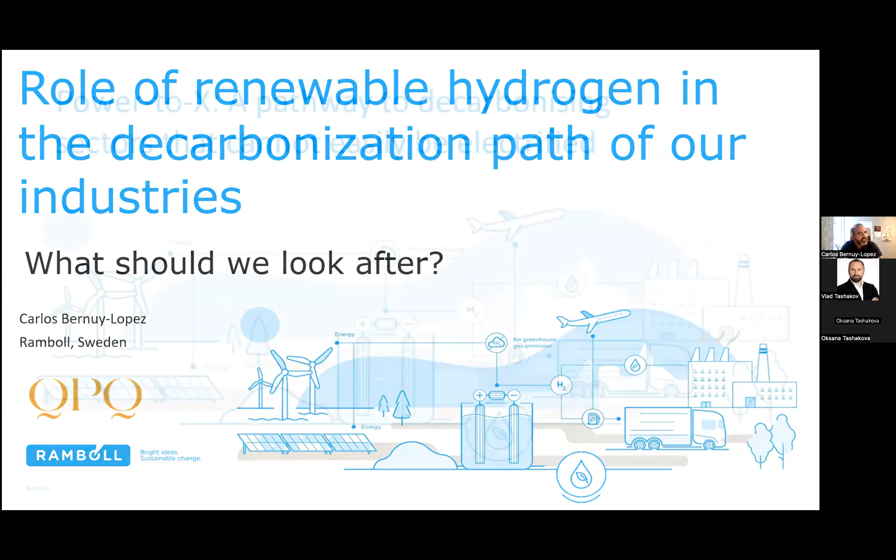Let me start with the concept of Power-to-X. You probably have heard many things about Power-to-X. To put it simply, Power-to-X is a tool that will allow us to bring renewables to places where it would be very difficult to get them—very difficult places to electrify directly. We can see in the picture the trucking industry, planes, and we should also add the maritime industry as our main focus to work with.

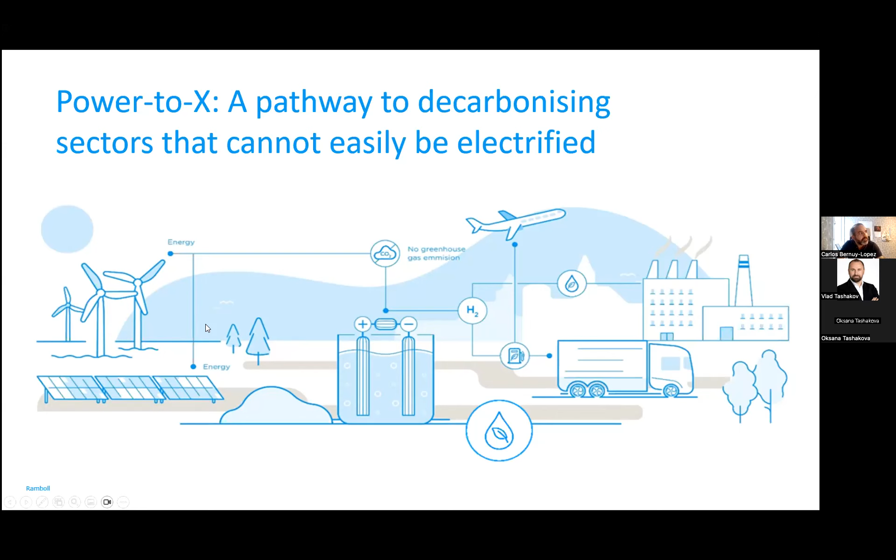So when you hear about Power-to-X—and sometimes it's a bit of a strange concept—think that hydrogen is at the center of it. But it's not only about hydrogen. It's about much more, because it could be about producing e-fuels, or about utilizing CO2, capturing the CO2. So it's a quite complex terminology that helps us bring renewables to those applications that are very difficult to electrify.

So let me explain a little bit what will be the role of green hydrogen, by telling you about our current use of fossil hydrogen, and I'd also like to refer a little bit to the current use of steel to motivate the use of this molecule.

You'll see that it is not new—we are already using quite an important amount of hydrogen. You could see 90 million tons, 100 million tons, depending on the source; you could even have less, but it's around that figure. It's responsible for an important amount of emissions, 7% of the total emissions in the world.

I'd also like to refer to the quantity of jobs associated with this industry, something quite relevant when we think about the economy. So over 3 million jobs are directly linked to the fossil hydrogen industry.

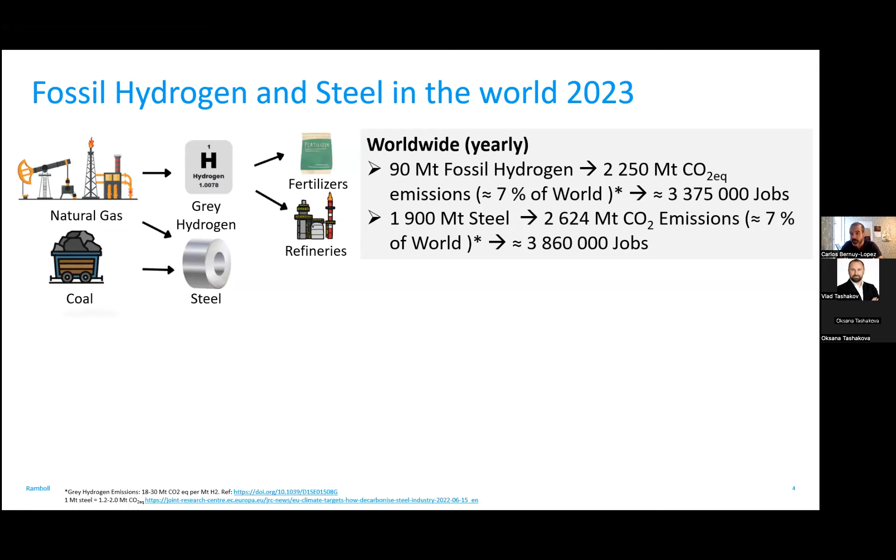I also put steel here as motivation. We all know steel is a very difficult industry to decarbonize. We don't have to emphasize the importance it has in terms of emissions, but also realize how important it is in terms of jobs and how many industries depend on it.

As you know, I come from Spain, I live in Sweden, and I work for a Danish company, so we are in a very EU context. I often refer to EU numbers to understand how big these things are.

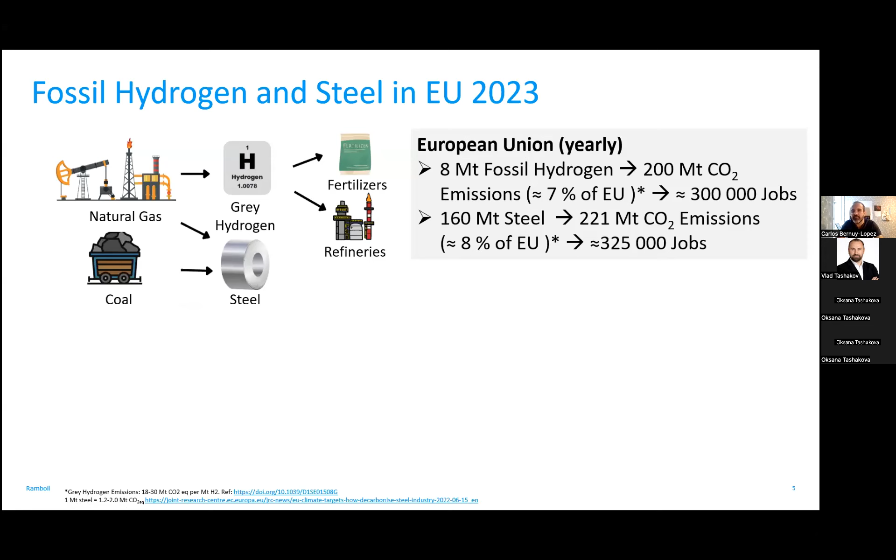So for us here in the EU, the use of fossil hydrogen is also quite important—it's not used far away. We also use a lot of fossil hydrogen and lots of steel. So there are lots of emissions that need to be tackled, and this is the motivation that brought the EU to these quite ambitious plans.

Producing around 20 million tons of renewable hydrogen, because it's not only about green hydrogen.

I will come back to that a little bit later, but it is quite a substantial task just to produce 10 million tons, which is the target the EU has set to produce internally. We would need around 100 gigawatts of electrolyzers that need up to 200 gigawatts of new renewable energy generation. So we are talking about a lot of electrolyzers to be built and a lot of renewable energy generation to be installed in order to decarbonize just these two sectors, which are not the only ones that we could decarbonize with hydrogen, as I was telling you at the beginning.

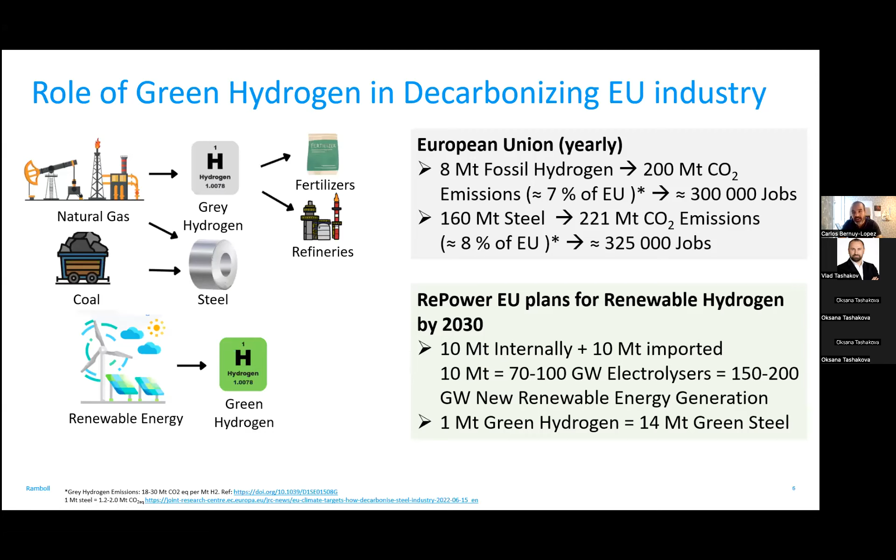But coming to this, I think it is a nice reflection and a nice discussion to think how much hydrogen will be needed in our decarbonized world. So first of all, I think it is important that we acknowledge where the hydrogen needs to be used. And as I was telling you in the first slides, hydrogen needs to be used for everything that is very difficult to electrify. You probably all know the famous hydrogen ladder from Michael Liebreich, which tells us the uses where it is much more favorable to use hydrogen, and other ones where we should electrify directly, because it's going to be much easier and much more economically advantageous to do it.

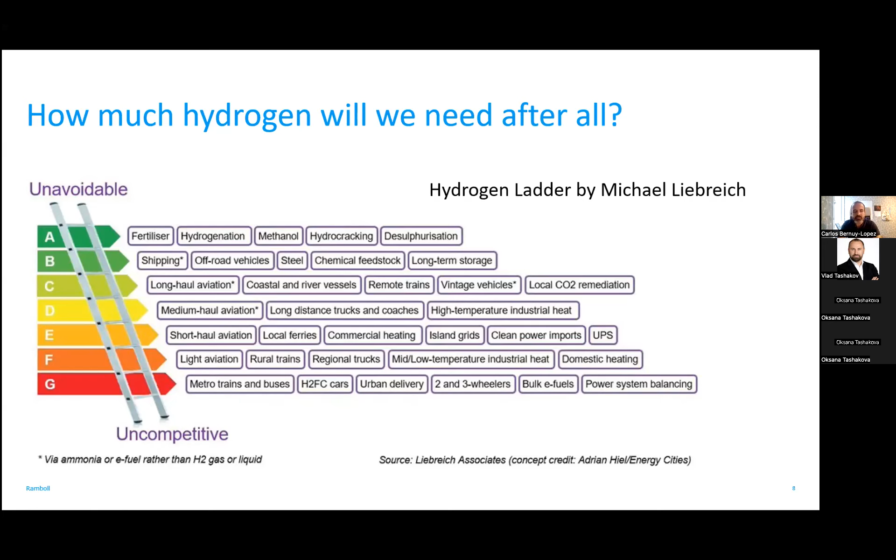However, there are debates and disputes about how much hydrogen is going to be needed. There are two main currents of opinion, but even the ones that are much more pessimistic, or let's say the ones saying that we will not need so much hydrogen, for example the Hydrogen Science Coalition, with Michael Barnard, whose posts you can probably read quite often on LinkedIn and social media, are anticipating that we will need lots of hydrogen, so more than 100 million tons. Some people are defending that we will need 300, maybe 400, 500.

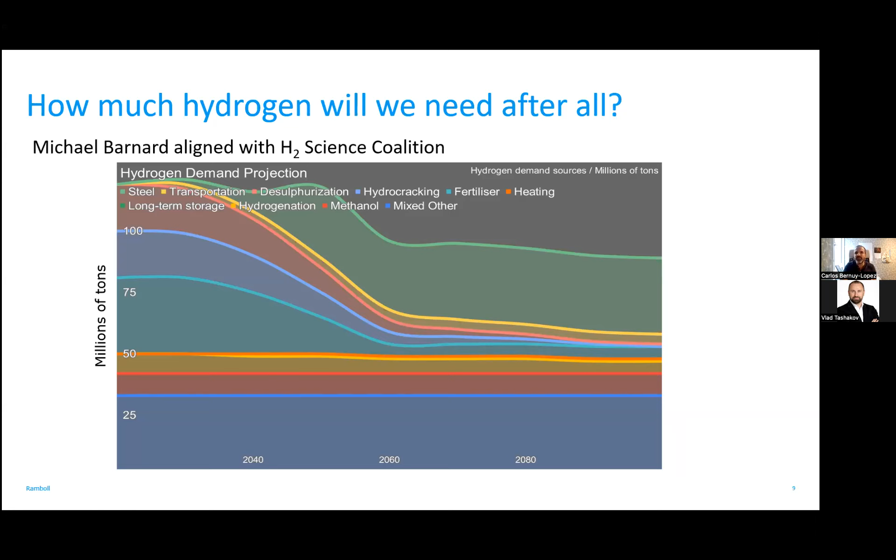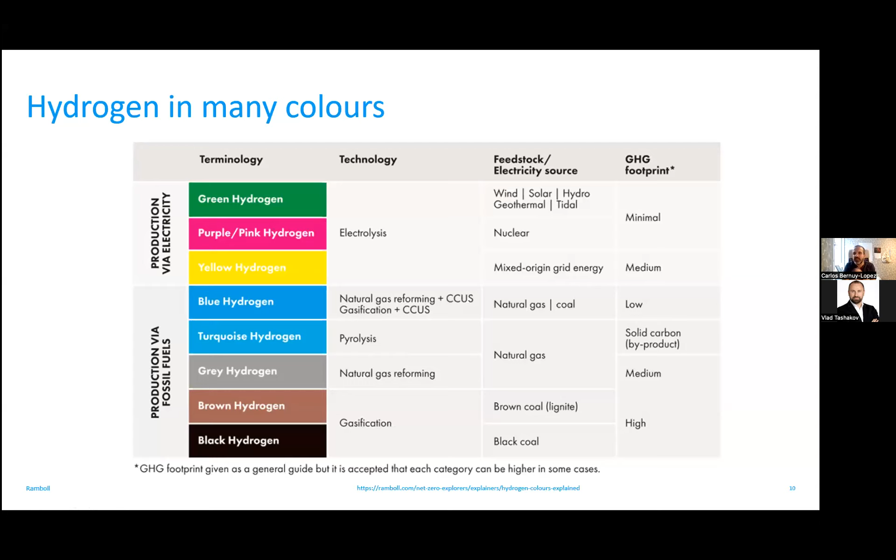So in this sense, I think it is also important to come to the types of hydrogen, right? We know that there are plenty. Sometimes it's getting a bit confusing. Right now we are mainly having fossil hydrogen, the ones here in the bottom part of the slide. Okay, which types of hydrogen will we have in the future? Well, in my opinion, and that of many of the people with me, the main types of hydrogen that we will be having in the future are these three, most likely with a large percentage of green hydrogen. Not little regarding blue, and probably not zero regarding gray hydrogen, because I guess we will continue using some fossil fuels, and in some cases gray hydrogen will still be produced.

Also, I think it is important to mention here what we call pink hydrogen. That's the one that is made with water electrolysis plus nuclear energy. So instead of getting the electricity from renewables, it's getting the electricity from nuclear power. As you can imagine, in the countries where this energy is predominant, the logical thing to think is that pink hydrogen would be the dominant type of hydrogen.

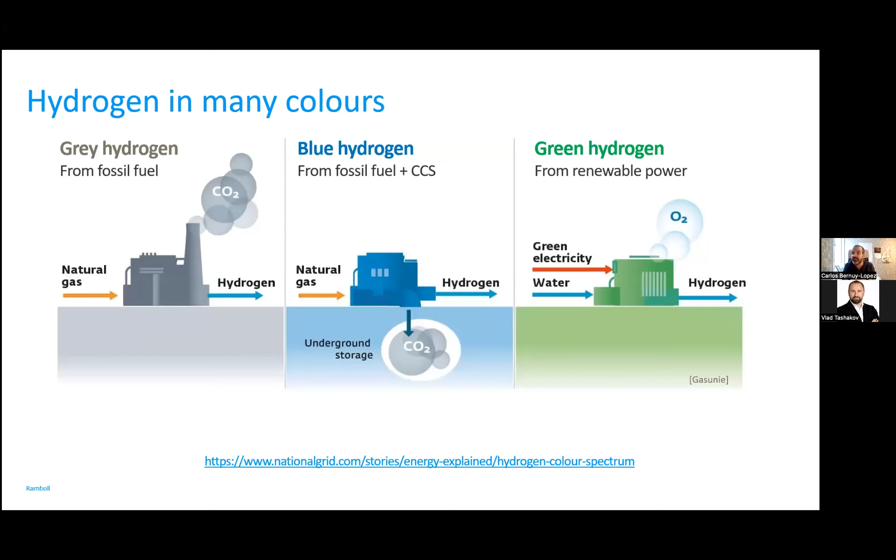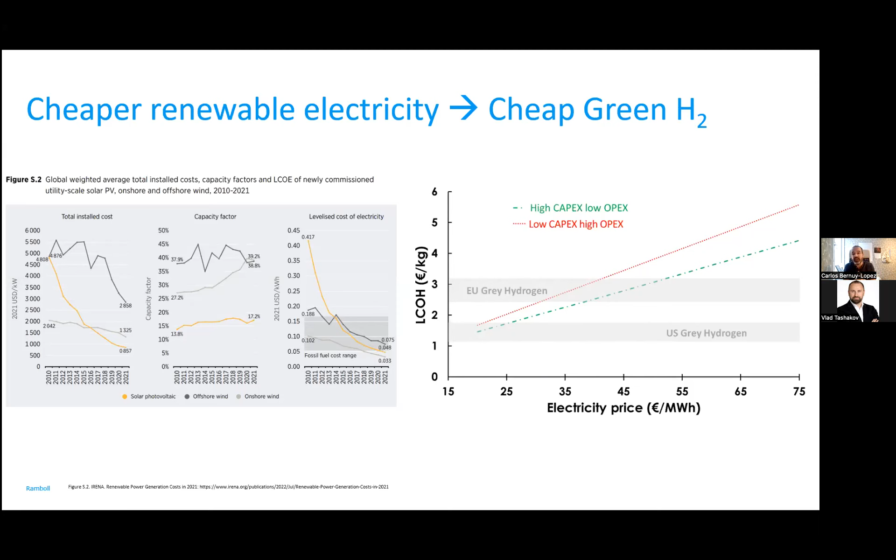So, saying all this, and as a bit of recap, taking into account what the hydrogen needs to be used for, the different tensions asking for too little hydrogen or too much hydrogen, and the types of hydrogen that we can have, some of them renewable, some of them less renewable, I think it is quite reasonable to think that around 200 million tons of hydrogen, of the molecule itself, will be needed in the future.

Myself, I always said all right, let's consider that at least half of that quantity will be green hydrogen. So that's a little bit why I'm promoting this number: hey guys, let's try to produce 100 million tons of green hydrogen as soon as possible. It is something that is not going to happen overnight, because right now we are producing nearly nothing.

So we need to come from 0 to 100 as fast as we can. And we are not talking about the 500 or 600 million tons that other people are claiming or other studies are defending. So myself, trying to be on the pragmatic side of the story, I say, okay, let's do this first and see where we get when we get there.

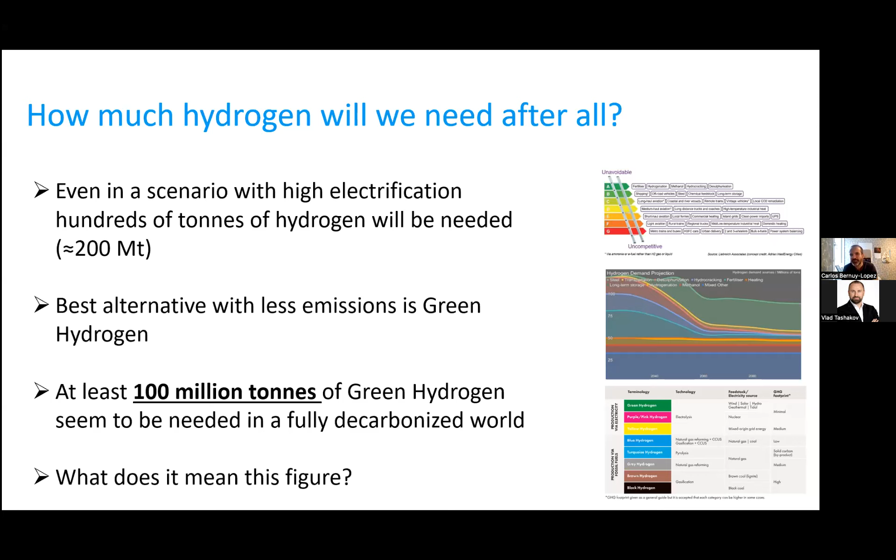But 100 million tons is a number and unit that probably for many of you doesn't say much. So let's try to bring this figure down to reality. First of all, 100 million tons of green hydrogen represents quite a large market size, as you could see. Just taking a value of 1.5 euros per kilo, you see that this is a more than interesting market to pay attention to, and that's the reason we see so much attention and so much traction in the last years.

When it comes to the electrolyzers, one can do simple math. Allow me a little bit. Maybe it's a bit too simple because it takes into account maybe too little a capacity factor and too little efficiency. But to give you a good number that won't be far from reality: in order to produce 100 million tons of green hydrogen, we need to have 1 terawatt of electrolyzers. And 1 terawatt is 1,000 gigawatts of installed capacity of electrolyzers.

This by itself is also another very interesting market sector. And one can measure with simple math, which can vary depending on which electrolyzer price you take, that this market sector is a very interesting one among all the renewable technologies that we have. And for you to realize the task that we have ahead, you need to know that last year we installed about 5 gigawatts. So we need to go from 5 to 1,000, in my opinion as soon as possible, because this will contribute to fighting climate change, which is what we are all here fighting for.

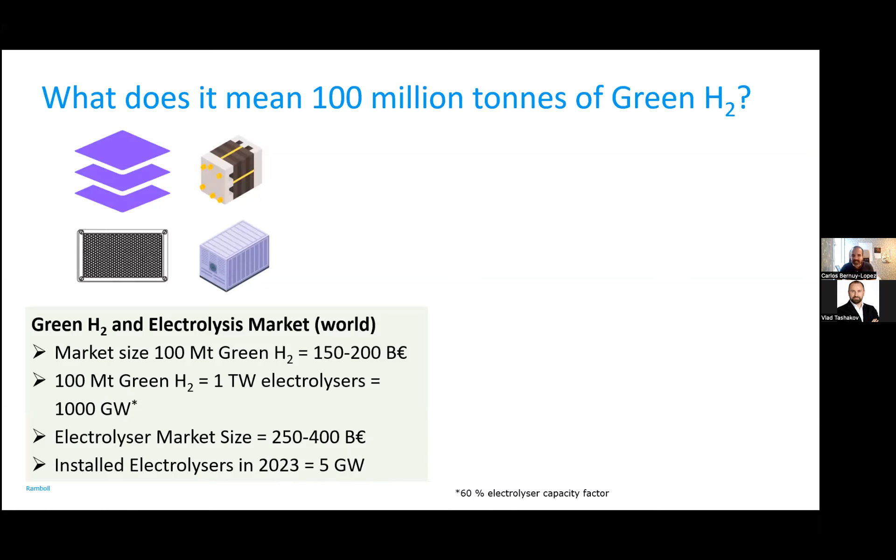But at the same time, this needs to be correlated with the renewable energy needed, right? We all know that to produce green hydrogen, we need renewable electricity. One may think that 1,000 gigawatts of electrolyzers is a lot of renewables that we will have great difficulty getting. Well, a simple math again is to just multiply this number by 2 or 3 to get the surplus renewable energy that will be needed to produce this hydrogen. And if we consider that this is electricity coming from solar energy, one can calculate how extensive 3 terawatts of solar panels is. That exercise is a bit silly, but it gives us a conception of what 3 terawatts of renewable energy means.

So if we fill a country like Croatia with solar panels, we will be able to get the energy. Just have a look at the world map, zoom out to see how big Croatia is with respect to many places in the world where we have available land to get renewable electricity, and we could all agree that this is not a matter of not having enough renewable electricity. It's a matter of getting it done.

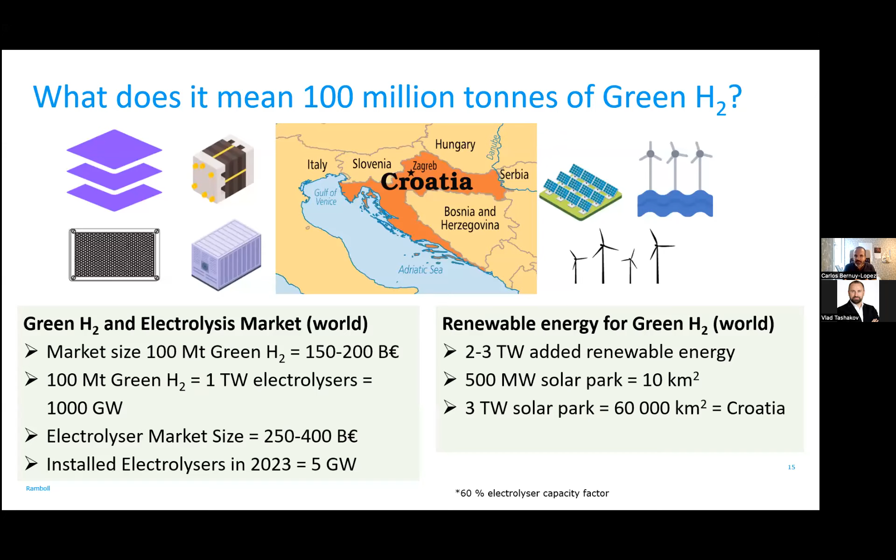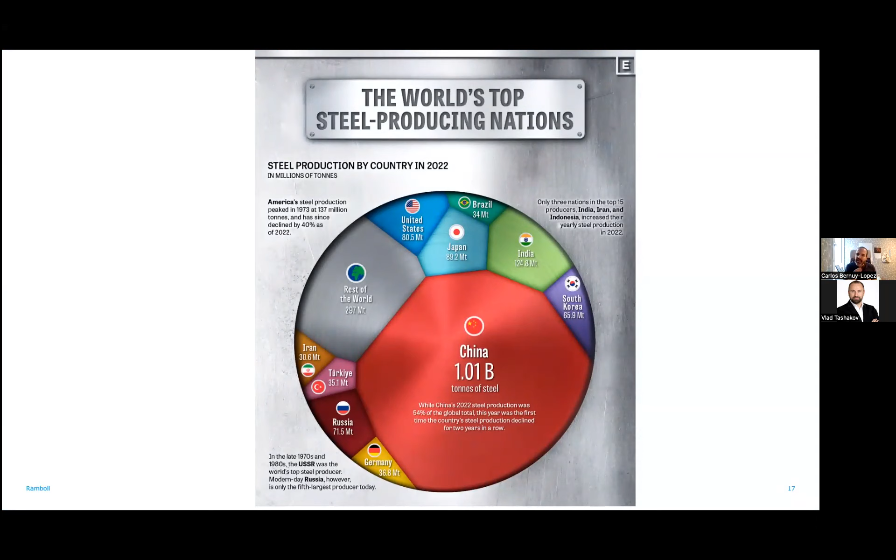So after this, I'd like to come to the second part of my presentation, which is telling you a little bit about the concrete case of steel. Steel is one of the more difficult sectors to electrify, and therefore it is where we are putting our hopes for hydrogen to contribute to decarbonizing this sector. You probably all know that steel is produced unevenly by different countries, and I put this picture to make you aware of how steel could have different importance for different countries.

So that kind of also, can you think of how China will look at this, most likely sooner than later, in my opinion? Or other countries, maybe I put my home country, Spain, may put other things first, or maybe give it less importance, because it is not such a big contribution for their economy. So it is a little bit to realize the unevenness of things, right?

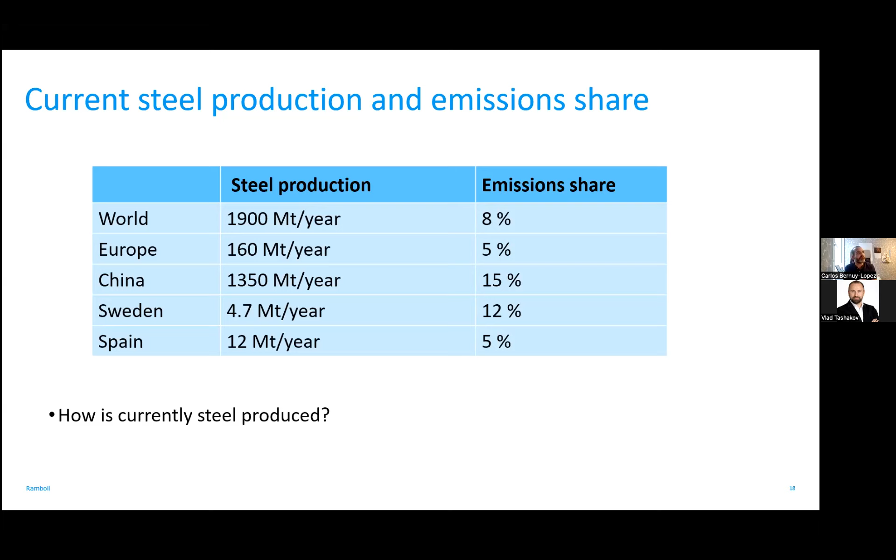It won't be all happening at the same time, because not everyone has the same interest for their own local industries. It doesn't mean that we don't have to address them, but I think it is also quite nice to realize about the different tensions in the world to overcome them as best as we can.

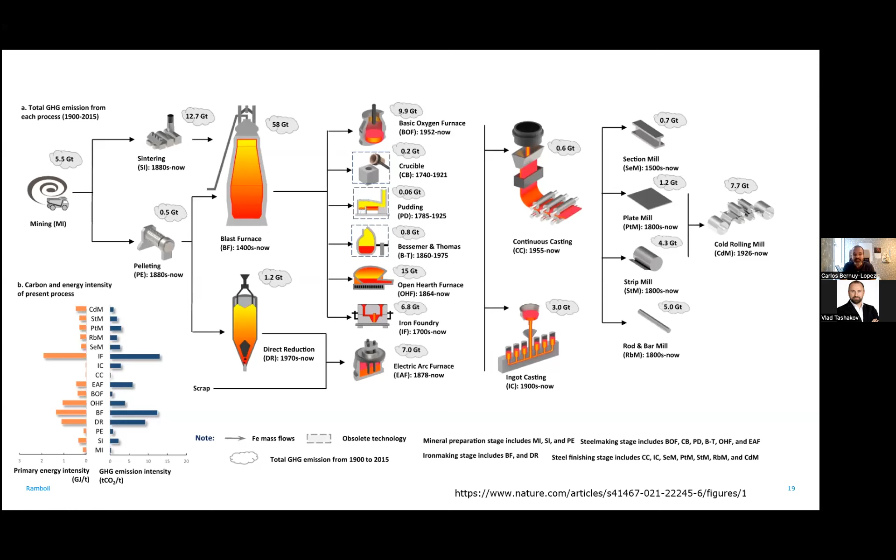And you see how the blast furnace is one of the biggest contributions. And it is there where we are willing to get our hydrogen to work. And this brings me a little bit to also explain to you how we produce green steel. Green steel is produced with the use of green hydrogen. So remember that in order to have green hydrogen, we need renewable electricity, and we use that green hydrogen as a reducing agent for our iron ore that we are going to put in a reactor that we call a direct reduction unit.

And from there, we will obtain what we call a decarbonized product, and that is the one that we will use in some more traditional, well, not so traditional, because they are electric arc furnaces, and they are ones that have been rather modern. You know that steel has been produced for more than a century, even nearly two centuries. So the electric furnaces for the steel guys, it's quite new.

So the combination of these three things, the production of green hydrogen, the use of a DRI tower, the direct reduction of iron, DRI, and the utilization of electric furnaces, of course fed with renewable electricity, will lead us to green steel. So this is why we are focusing so much on hydrogen, and why we are now saying that we need to push green hydrogen to be developed for steel to be decarbonized.

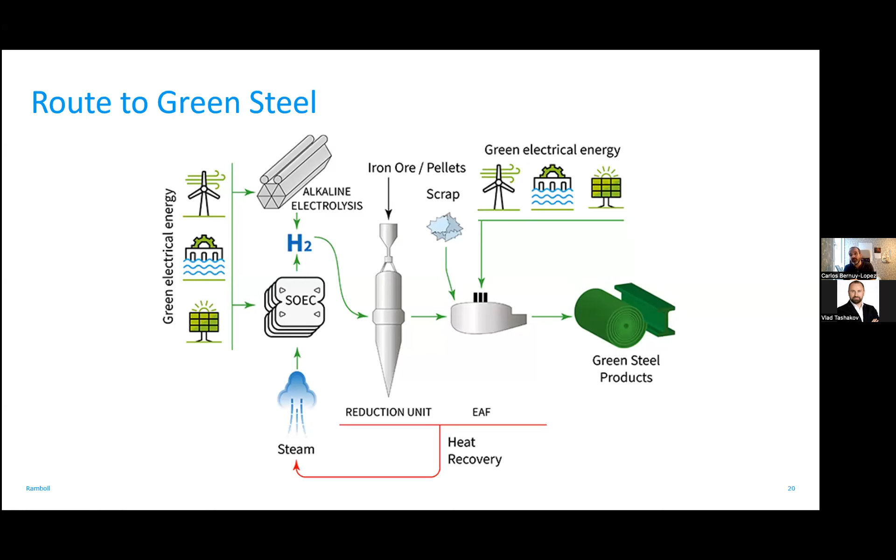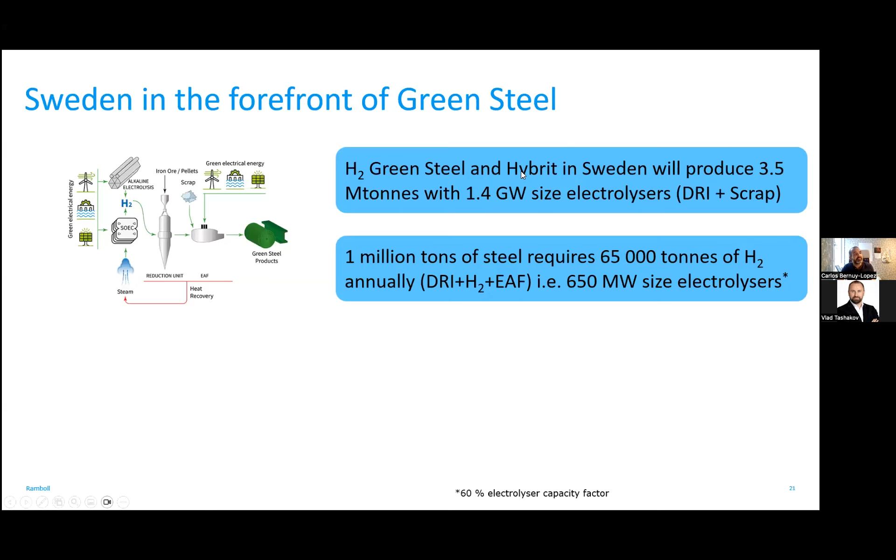And just to give you a bit of numbers of Sweden and their activities to realize how this is happening for Sweden. So there are these two main initiatives in the very north of Sweden, where they will produce 3.5 million tons with the utilization of 1.4 gigawatt electrolyzers. So this is a considerable amount of the current steel production of the country. As you see, right now, Sweden produces around 5 million tons. So it means that we will decarbonize more than 50% of the current production in a few years, because these two projects would like to be online in the late 20s or early 30s at the latest.

All right. So coming to this point, I would like to also make you reflect about how to make this happen. So how do we produce green hydrogen? Well, first of all, I think it is important to realize what we have in a hydrogen plant, because we've been putting a lot of focus on electrolyzers, but the hydrogen plant is much more than electrolyzers.

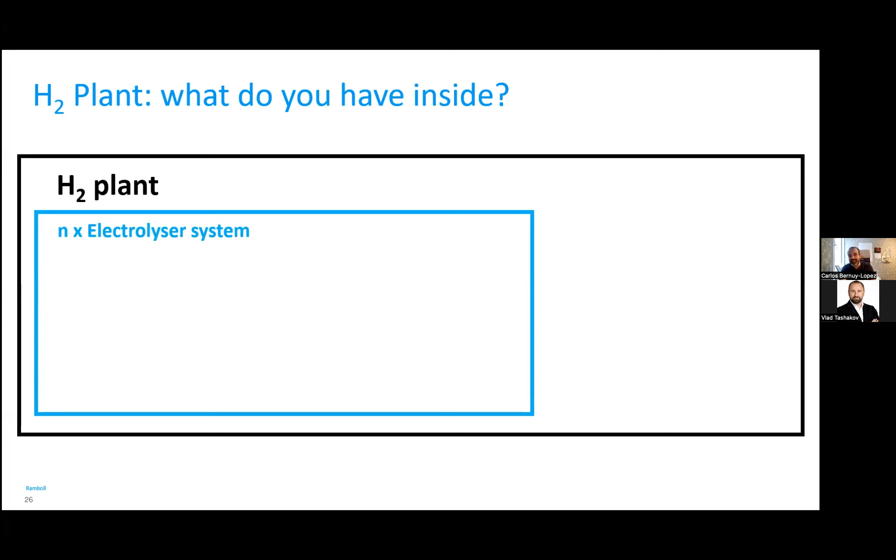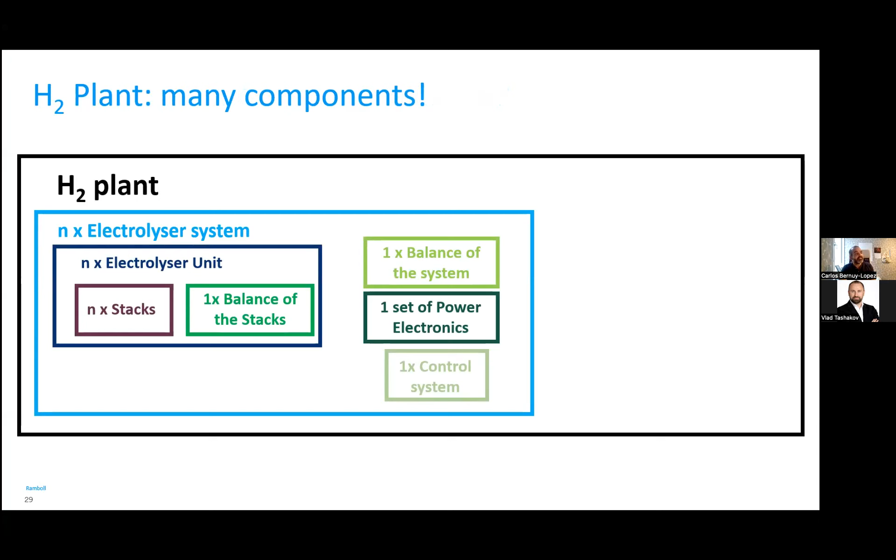It is true that electrolyzer systems are rather complex pieces of equipment. They are made of different parts, such as the stacks, the electronics, the balance of the stacks, the balance of the units, in order to have the gas purified and separated, and so on and so forth. But many times you would need to either have a few electrolyzers together, or to end your hydrogen plant with extra equipment, equipment related to what we call the balance of plant. So compressors, nitrogen supplier, air supplier, hydrogen storage, very dependent on your specific project.

So many times you will realize when you are doing this sort of project that you cannot only rely on the electrolysis and the electrolyzer manufacturer. You need to have a very good picture of what is happening and what we need in order to have the hydrogen that your offtake will demand. Sometimes you will need hydrogen at high pressure, or you will need hydrogen at normal pressure, and compressors won't be needed.

And depending on this final need, you could use it also to produce ammonia. We could use it also to produce sustainable fuels. It's going to have different requirements. That's where the balance of plant comes into place. It's probably too little to realize the dimension of this, but these are things that you need to take into account. I also put other boxes that need to be thought about.

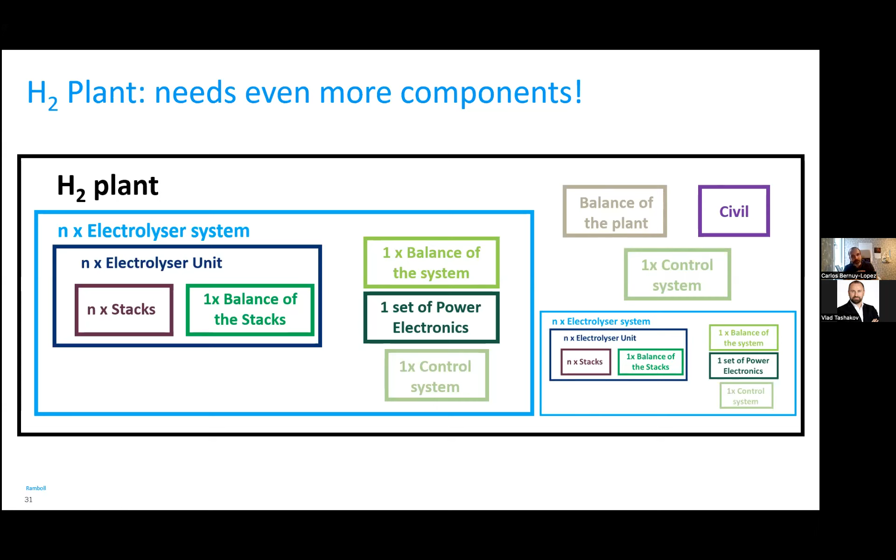And maybe here we can also realize, because you can always have your electrolysis unit or your electrolyzer unit at the center of the hydrogen plant, but you need to make sure that you have the right water; we need high quality water to do the electrolysis. So you need a water treatment plant. You need to have cooling for your equipment. You have a lot of equipment, you need to make sure that you have that. You need to take care of your power connection. You have a lot of power to handle, and that is something that you need to take care of.

Something that sometimes is disregarded is all the civil work that needs to be taken care of for hydrogen plants: buildings, infrastructure, access roads, all these things that need to be put together in order to have a working hydrogen plant for the desired power-to-X project that you would like to develop.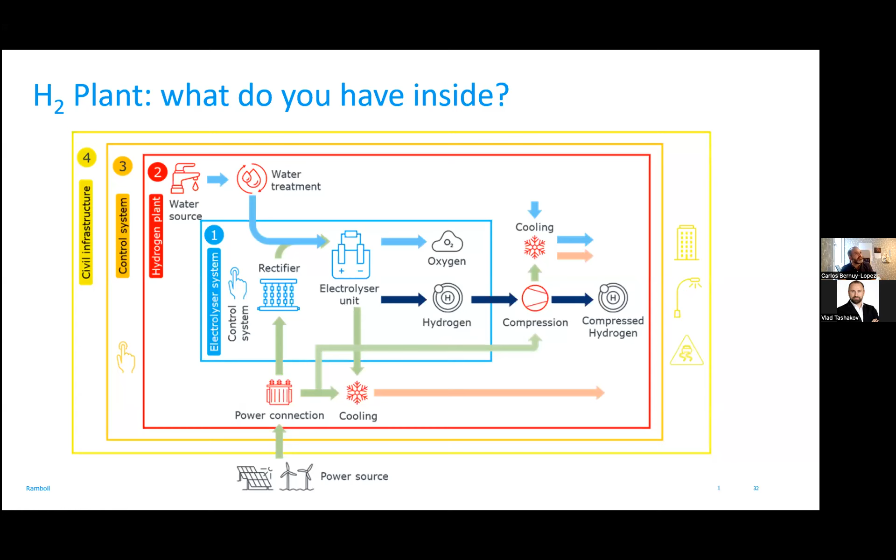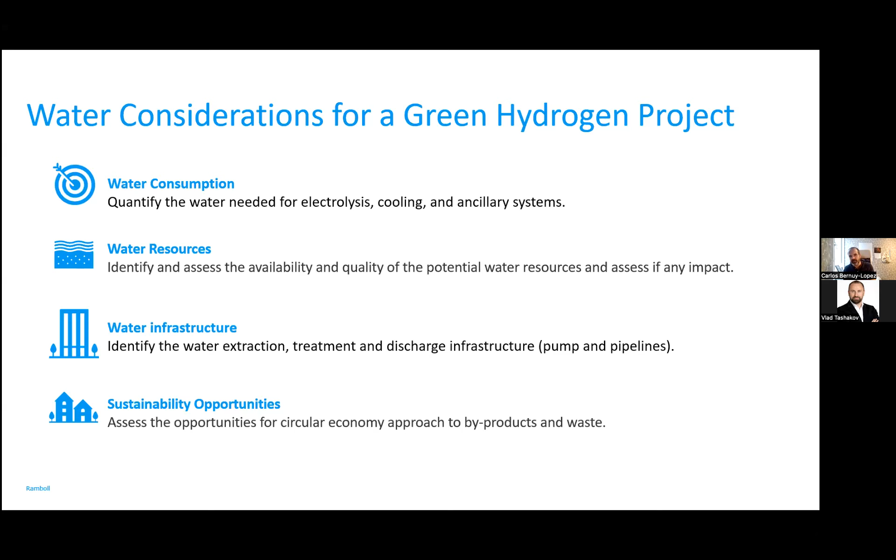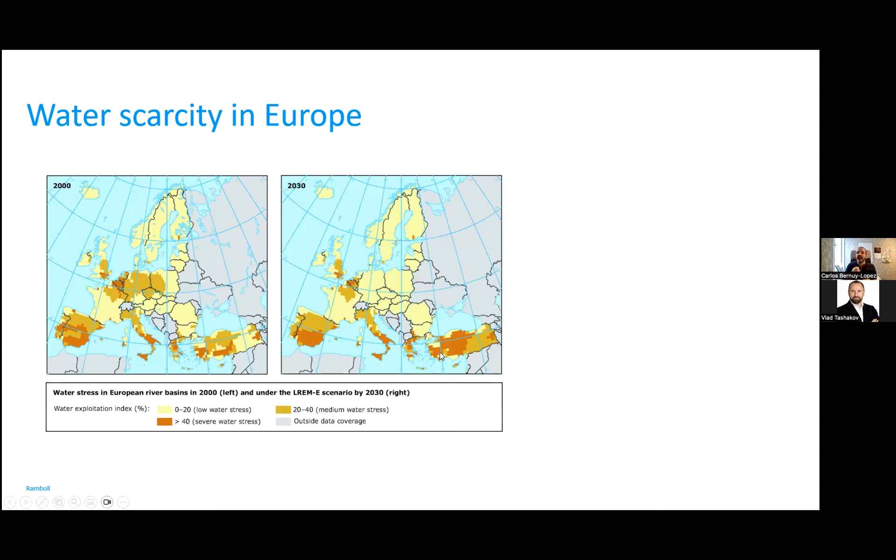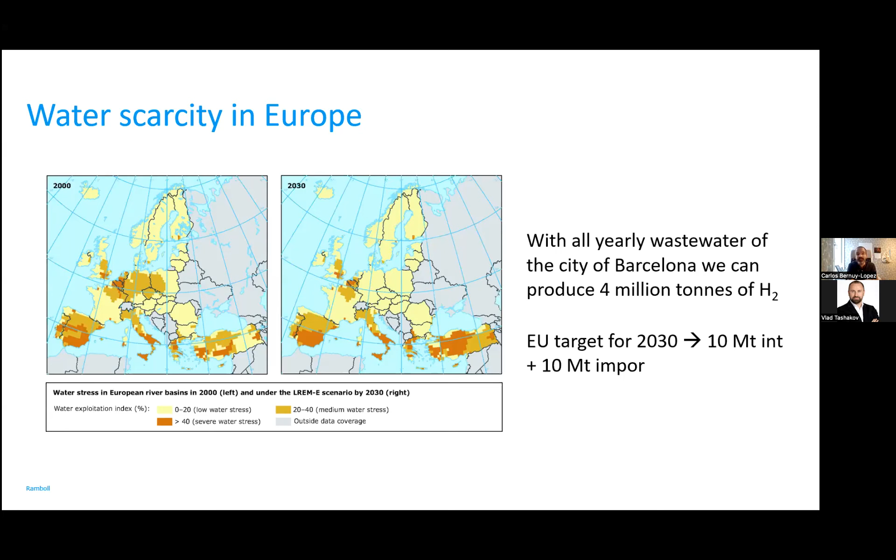But in order to avoid these issues, the water that we have available in terms of wastewater is tremendous. And this will also include all these circularity ideas and circularity concepts that we are all very happy to include in our projects. So keep in mind when you do a project and you think that water is an issue, that most likely you will have wastewater nearby that you could utilize, or you could help to get it clean and then use it for yourself. So I think there are synergies here around water that we are not explaining enough on the hydrogen part.

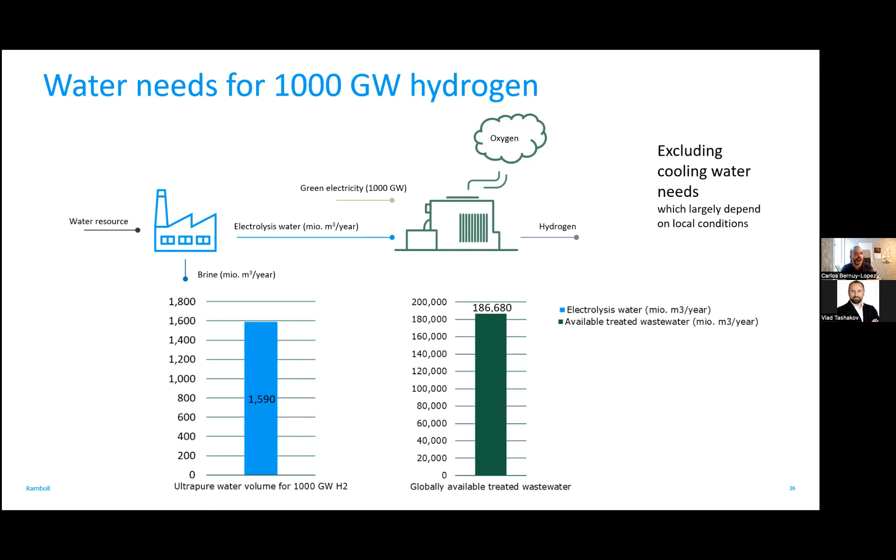Okay, and to finish my presentation, I'd like to give you just a few highlights about the technologies themselves. As I told you, I'm a geek about this. I've learned about technologies all my life, and this is actually what makes me happiest in working on projects around the technology, trying to help the guys distinguish which one to choose and the different characteristics. So most of you have heard about the four technologies that we have.

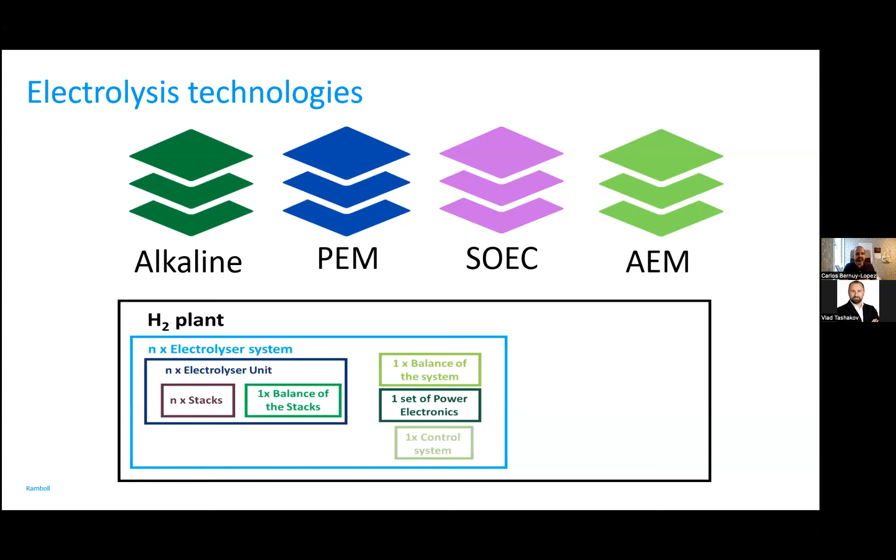When we talk about alkaline, we have 2 types, atmospheric and pressurized. They are close but different because one works at atmospheric pressure, the other one's pressurized between 15 and 30 bars. Then we have the membrane technologies, the proton exchange membrane, PEM technology, the more advanced of the membrane technologies, working in an acidic media. And then we have the anion exchange membrane technology, working in a basic media, and it's the less mature of the technologies so far.

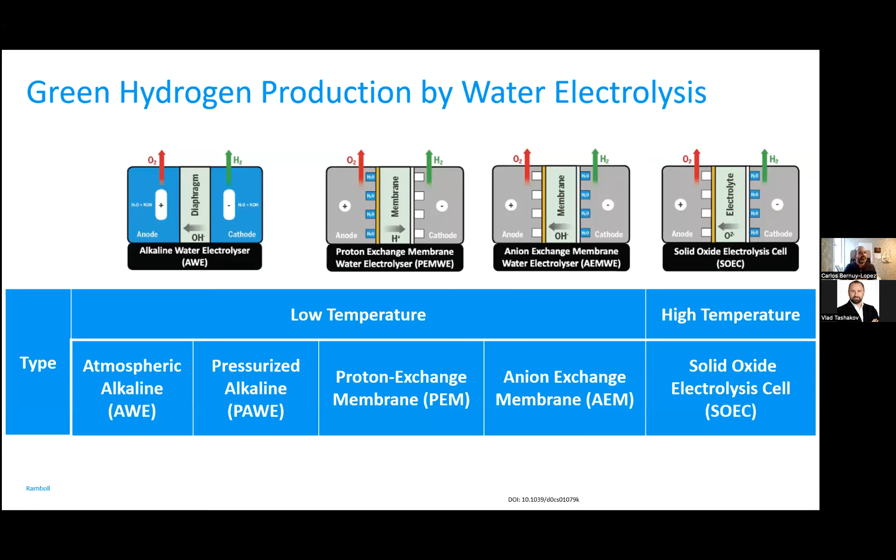And then in another classification, we will have the high temperature ones. In this one, you'll have some characteristics of the technologies. I think the more relevant ones are the temperature. When we talk about low temperature, what do we mean? We mean below evaporation of the water, so 60, 80 degrees, but also pushing it a little bit to get the thermodynamics in our favor. And when we talk about high temperature, we talk about steam electrolysis, so we don't talk about water electrolysis anymore.

One of the main differences among the technologies are the materials that they use. Alkaline uses mainly lots of nickel and carbon steel. PEM would need more expensive materials like titanium, platinum, and iridium. Anion exchange membrane, on the other hand, can also profit from cheap materials like nickel and carbon steel. While solid oxide cells, solid oxide electrolysis, are made of cheap and abundant materials - oxides of these guys plus stainless steel - making them also quite interesting from the point of view of cost, because these are cheap and abundant.

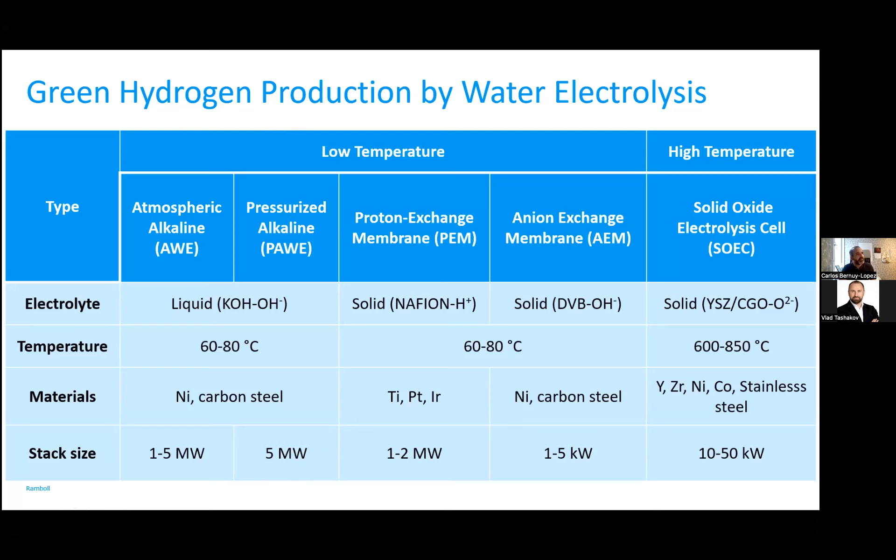Let me explain a little bit why SOECs have such very good efficiencies - this is one of the main advantages of SOECs. You will hear that sometimes it's a bit counterintuitive that a high temperature technology working above 600 degrees C will have higher efficiencies. Well, it's all about thermodynamics and the voltage that the reaction operates at. At high temperature, we can take advantage of the little overpotentials of steam electrolysis. At low temperatures, when we have liquid water, we need to overcome much more overpotentials, and we need to push the reaction and the voltage much higher, leading us to a loss of efficiency.

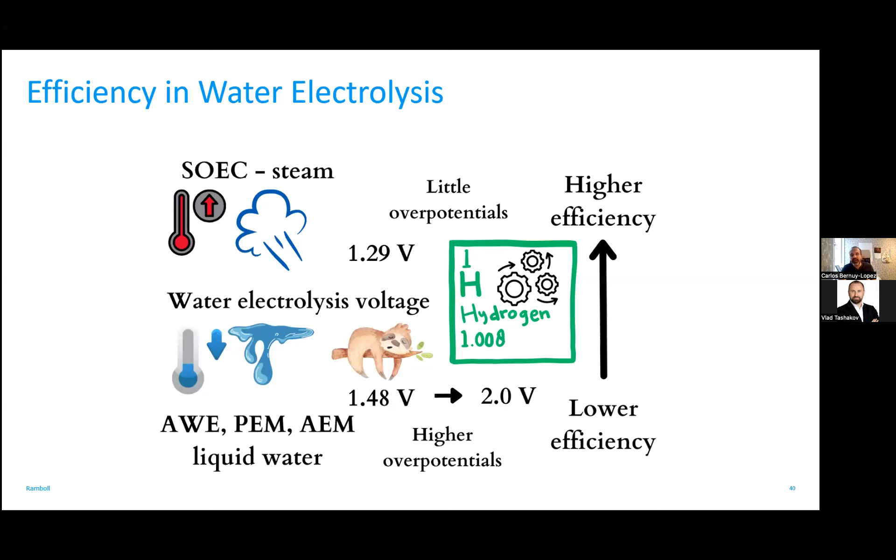Alkaline has the advantage that it has the lowest capex and the most maturity among all the technologies. However, it has a large footprint and high energy consumption. PEM, due to their membrane technology, has the capability for high flexibility on the load taken from renewable electricity, meaning we could ramp up and ramp down easily without causing a lot of damage in the stack. And it's also very compact.

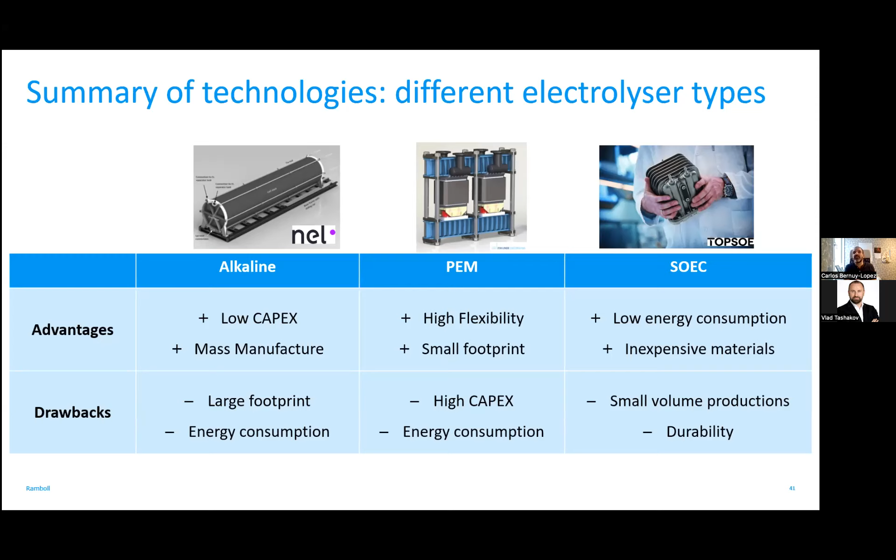However, here we are talking about expensive materials in order to make the reaction, and we will be leading with higher capex and higher energy consumptions, because we will be dealing with low temperature electrolysis. SOECs, on the other hand, have the very nice advantage of very high efficiencies and low energy consumption, and at the same time they have the potential to be quite cheap because they are made from inexpensive materials. But right now we have to work to make them last longer, to make the stacks much more durable, and to produce them in larger scales.

So to finish, let me tell you where I think we should try to put our technologies to work, because depending on what project we will be having, its technology will work best.

So when we have large footprint available and low electricity price, our alkaline solution would be the preferential solution right now. When we are more in a small footprint—think of an offshore project, for instance, or a hydrogen refilling station, or a site that doesn't have much space for everything you need to put there—PEM is a very good solution. If in addition you have a variable renewable source, it will be a very good solution for you.

On the other hand, SOECs could take advantage of their high efficiencies when coupled to a process with high amounts of excess heat, which will also allow us to use more expensive electricity. Thanks to my high efficiency, I will manage to get a business case with a little bit higher electricity cost. However, we all know that electricity prices are our main headache these days, and we need to get renewable electricity as cheap as possible for this to happen.

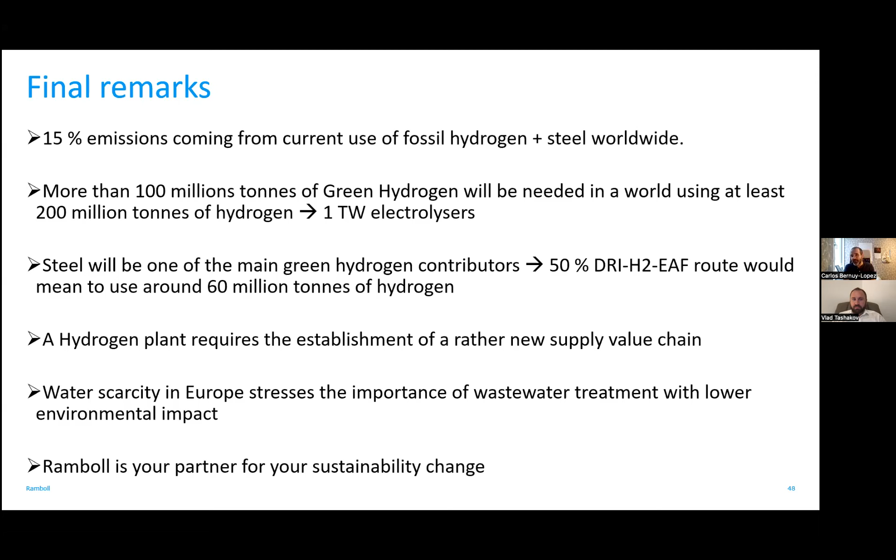So as conclusions, please keep in mind that lots of emissions need to be tackled, and hydrogen is a great tool for this. 100 million tons is, to me, a very nice target to reach. It means a lot of electrolyzers, so we need to get the job done. Please be aware that the hydrogen plant is quite complex, that water scarcity can be an issue, but at the same time an opportunity. And don't forget that we can be your partner for your projects.

Thank you, Carlos. Great presentation. A lot of new things I learned about hydrogen. I'm not a technical guy, but this was very easily delivered and absorbed. This information is great, and I'm sure that a lot of our attendees would agree with this, and found it valuable. A good indicator for this is the number of questions. So it's good that we got a little bit of time. I don't think we'll be able to cover all the questions, but let's briefly cover as many as we can.